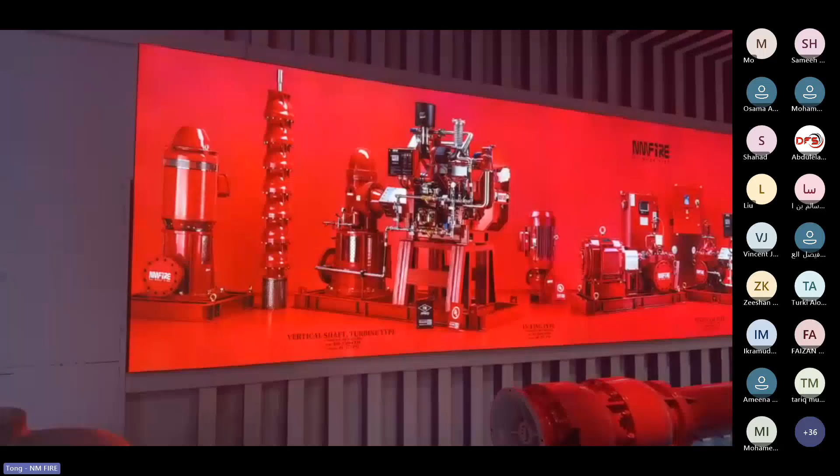As you can see, this picture is showing different types of pumps. First of all, we have a full range of vertical turbine pumps, starting from 100 GPM up to 7,500 GPM, and the pressure we can almost reach is 400 PSI. And of course, we have vertical inline pumps, with water flow starting from 50 up to 1,500 GPM, and the pressure can reach 200 PSI. And this is the split casing pump, starting from 300 up to 8,000 GPM, and the pressure can reach more than 600 PSI.

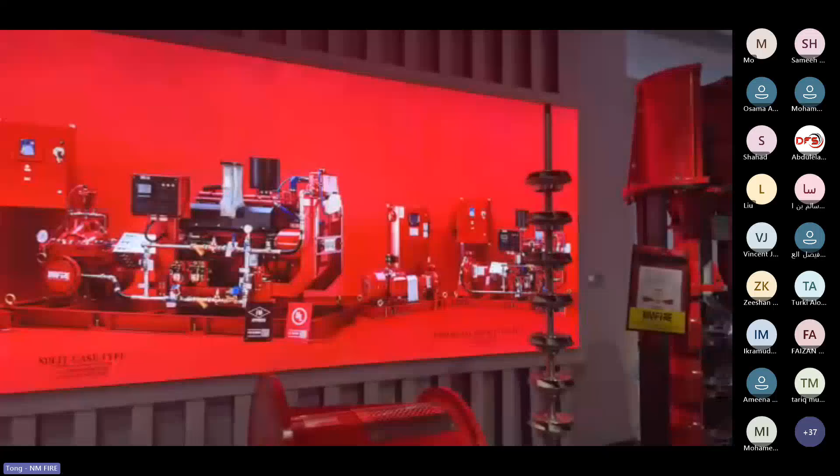And of course, we have end suction pump, starting from... hello, can you hear me? Yes, we are with you. Okay, because just now someone was calling me. This is the end suction pump, starting from 50 up to 2,500 GPM, and the pressure we get is up to more than 200 PSI as well.

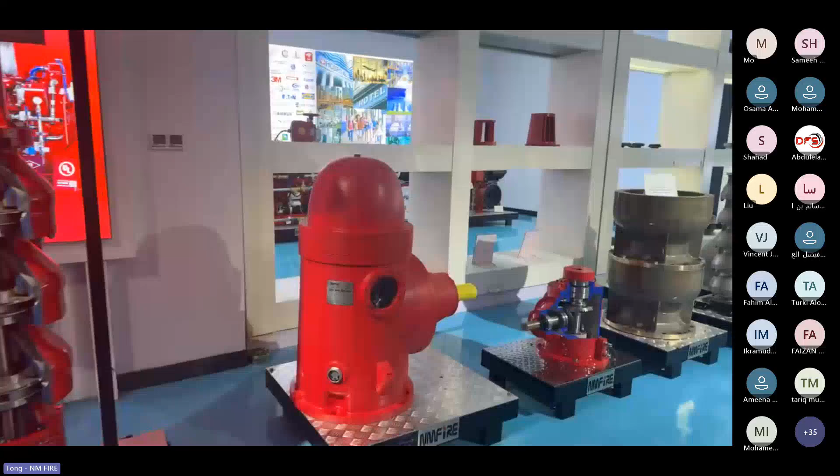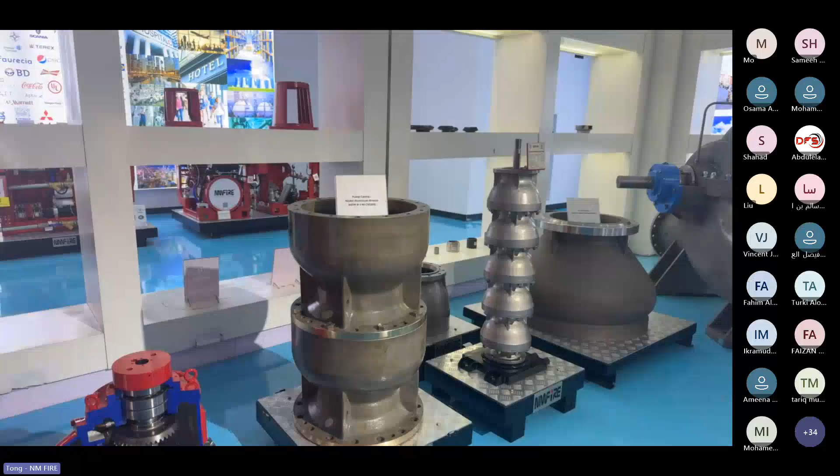Okay, this is our vertical turbine pump and right angle gearbox. For our right angle gearbox, we have our own FM certificate, which is one of the only few choices in the market. And this is the vertical turbine pump, one component made by nickel aluminum bronze for seawater, and duplex stainless steel and super duplex stainless steel. We are very strong for seawater applications as well, as we have our own foundries, and we can produce different grades of material.

In front of you, this is one small vertical inline pump package. This small package includes everything, and what you need to do is just connect suction, discharge, and the power cable. That's all. Whenever you have a very limited pump room, you can choose this type of pump.

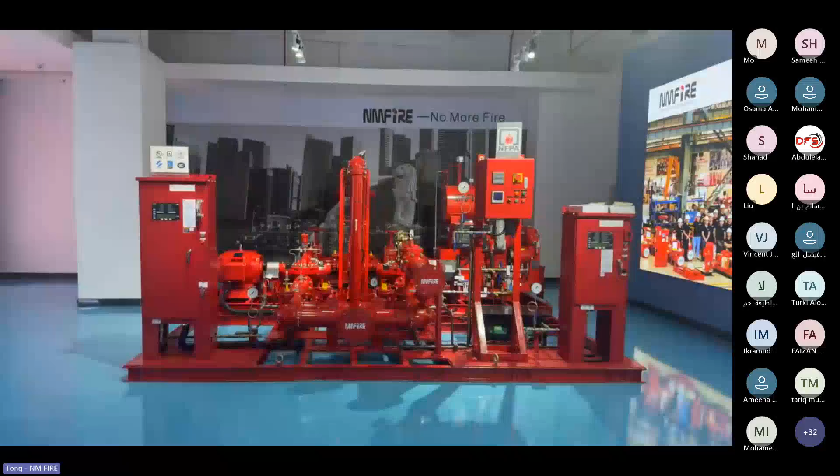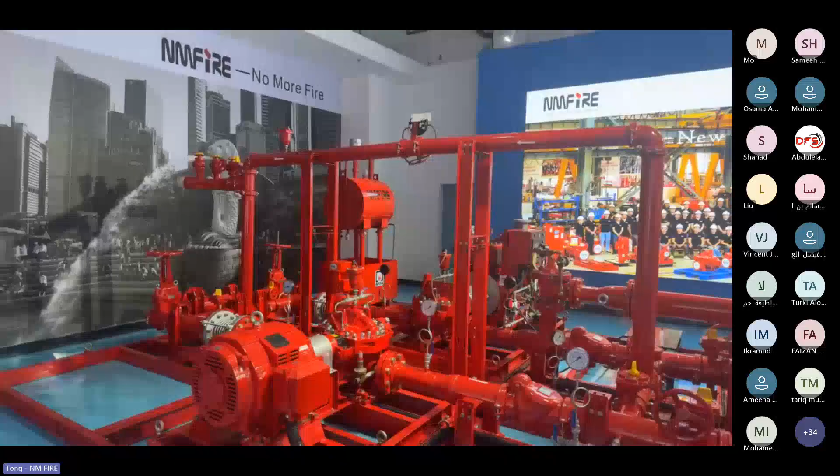And in front of you, this is one standard NFPA 20 firefighting package for split casing pump. Let me check around and show you. Including one electric motor pump and one diesel engine pump, of course jockey pump, and all the accessories like valves, piping, control panel, fuel tanks. This is one-stop solution.

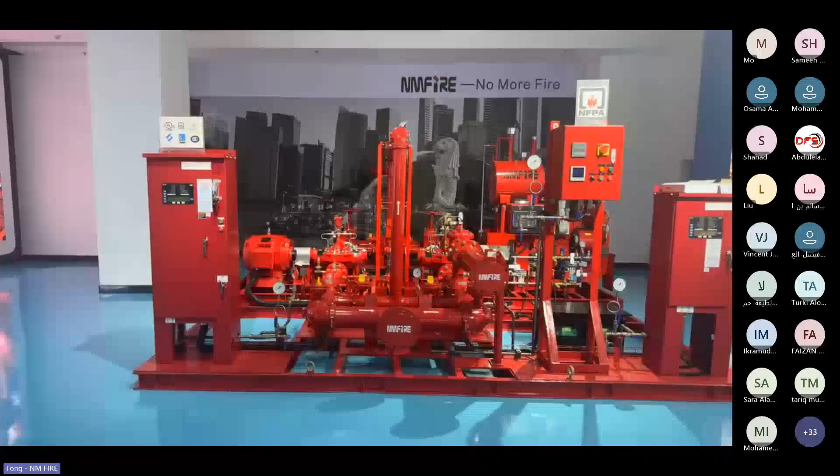We assemble in the factory and we will split it into 3 parts and we can load it inside the container. This kind of package is very convenient for the customer, and they will avoid installation mistakes, because if you have a very good UL listed and FM approved pump, but the installation is wrong, it's also useless, because this pump works as a system, not individually.

Let me go to the other side of the showroom. I will not take too much time inside the showroom, and I will give more time in the factory.

This is our diesel engines. We have our own unique design, which is totally different from any others. So if you are coming to visit our factory, I will give you more details.

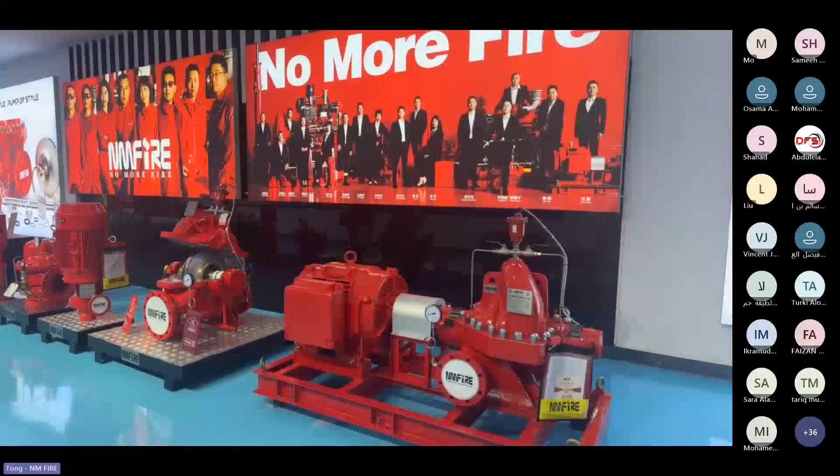This is one of the electric motor pumps with 2 stages. That is why we can reach up to more than 600 psi. This kind of pump is used for high-rise buildings.

And this is one of the base split case pumps for split casing. You can see this is a double volute design. This is very important for firefighting pumps, to balance the force from the exit direction.

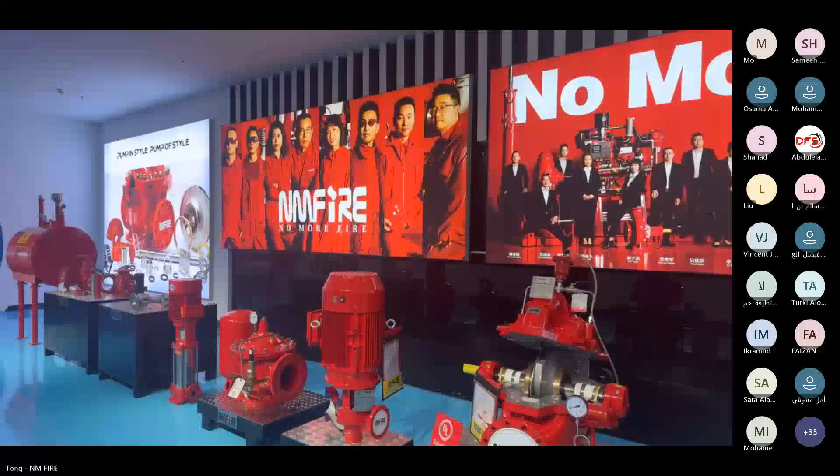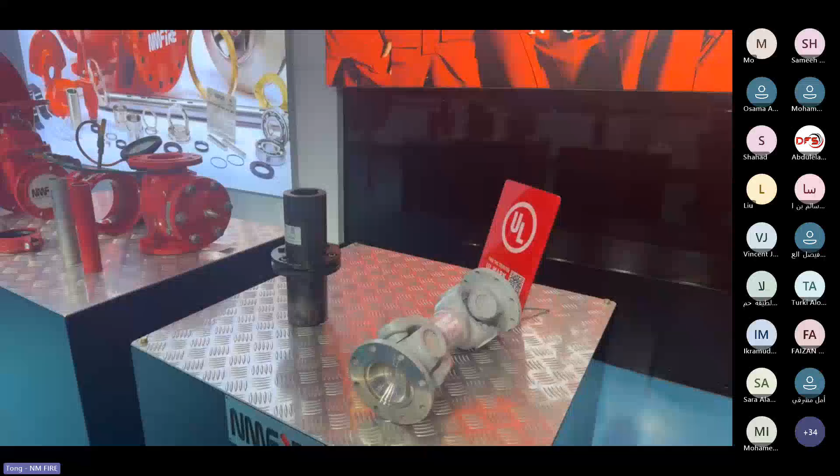And we have vertical inline pumps, as I just introduced. For the couplings, the coupling is one of the key components of the firefighting pump set. According to NFPA, the coupling must be UL listed. So all our couplings are UL listed, already included in our proposal as standard. We are 100% compliant with NFPA 20.

And the fuel tanks. We have our own fuel tank, which is also UL listed. This is our standard equipment, which is already included in our standard quotation. You don't need to ask. So we will provide you the UL listed fuel tank.

Now I'm trying to go outside the office building, and then I will proceed to the factory to show you around.

Our factory is located in Changsha, in Hunan province. Changsha is a very beautiful city in China, and we are located in the center of China. It's very convenient if you come from Beijing, Shanghai, or Guangzhou, taking only 2 or 3 hours, and we are very close to the Changsha airport. So I would like to invite all of you to visit our factory, and then we will have a more deep introduction.

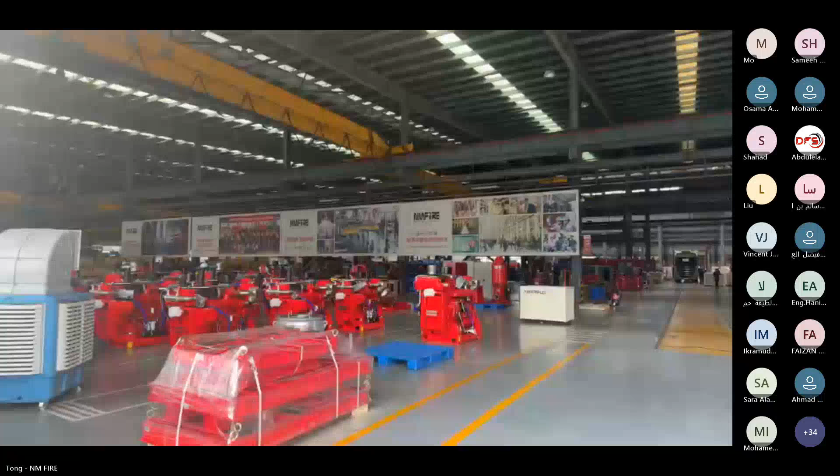And now I'm going inside the factory, and I will show you our assembly line inside the factory. Right now I'm inside the factory now. This is one of the assembling areas of the factory. I will start from here, and then I will show you all the details.

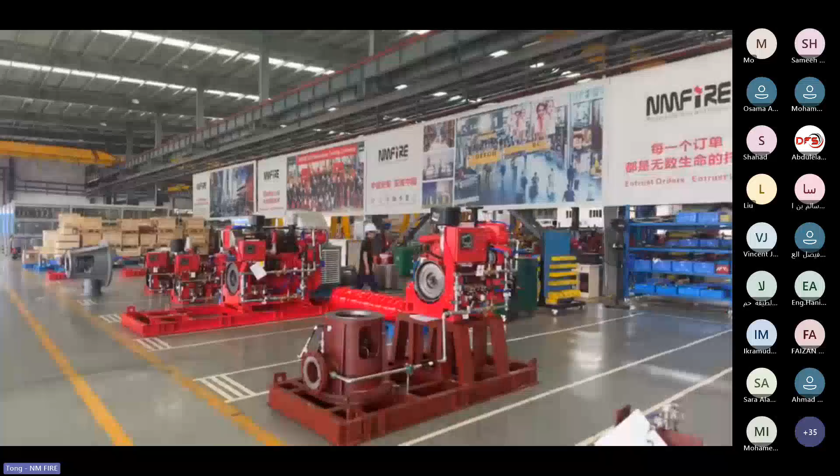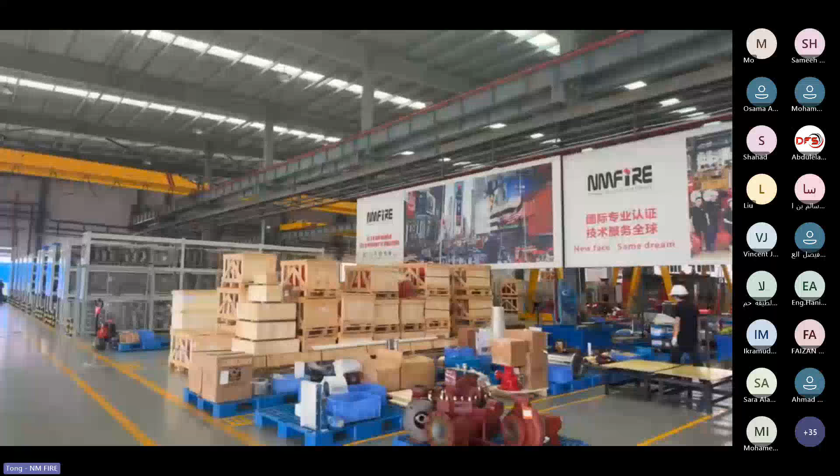In front of you, you will see a small package for the vertical turbine pump. If you look carefully, you will see the difference. We have a common baseplate. Not like others, who install the engine and the vertical turbine separately on the floor. With this kind of design, you don't need to do alignment on site, because all the alignment will be done in the factory. It will save a lot of work at the site.

And this is our stock area. You will see all these components are available at 24 hours. All this is component, shaft, impeller.

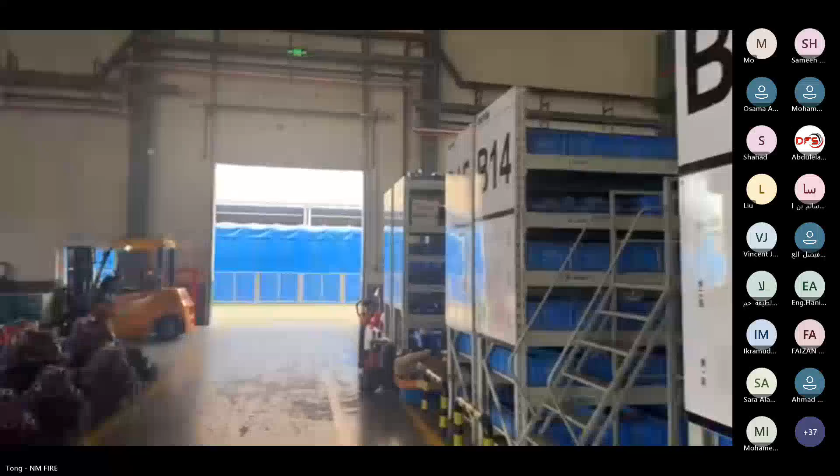And other side is the stock for our bare shaft pump. I will show you here, right here. We invest a lot for keeping a good stock, for the delivery time. That is why we can make sure we have the shortest delivery time, which nobody can offer you.

For diesel engine pump, we can finish it within 4 weeks. If you have any urgent project, we are the best choice. Because we are producing everything by ourselves. We are producing the pump, we are producing our own engines, so we don't need to depend on any others.

This is our diesel engines, and it's already been tested. And in front of you, this is one of our machinery areas. I will show you.

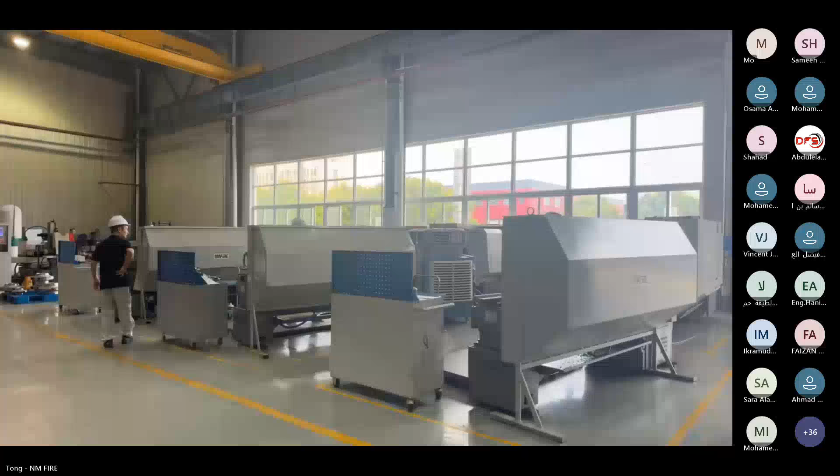So the impeller and stuff. And we have our own foundry, but it is not in this Changsha, because Changsha is a city. It's not allowed to have the foundry inside Changsha. So it is outside of the city.

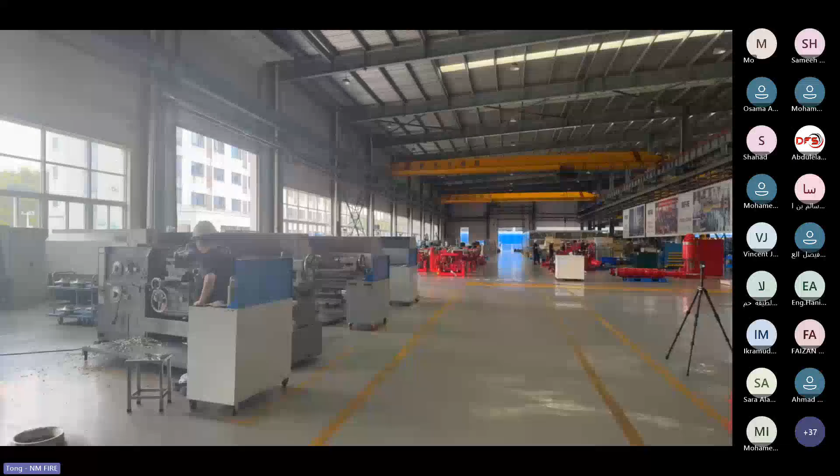In front of you, this is the biggest firefighting pump in the world with UL and FM certificate. The water flow is 8,000 GPM.

This pump is already installed in the Daxing airport, which is the biggest airport in the world. With 8 pump sets, we won this project already. And this pump is right now working well in the airport project, in Daxing airport.

And in front of you, this is one of the projects in Cyprus, in Europe, for the seawater application. I will show you closely. This is a duplex stainless steel seawater vertical turbine pump.

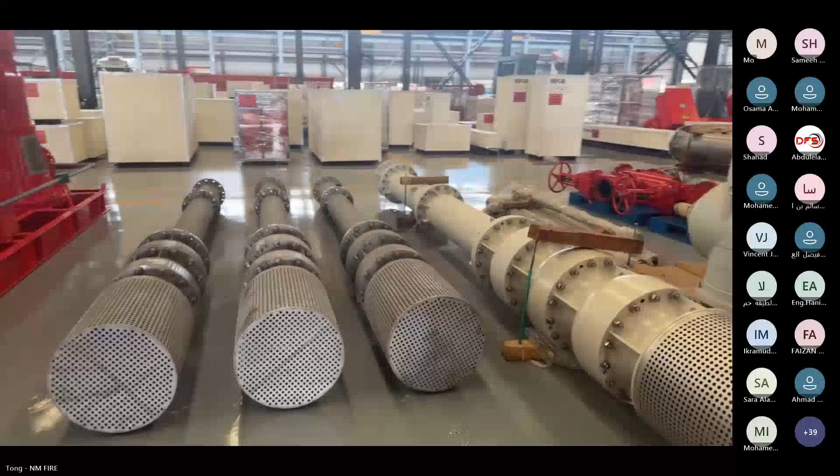The seawater application. And this is the diesel engine, and the pump will be installed down below to suck the water from underground.

I would like to highlight also this one, this blue color. We call it torsional coupling. When you are using a vertical turbine pump with an engine driver, you have to use the torsional coupling according to the NFPA standard. But unfortunately, right now, most of the manufacturers don't want to use it because they want to save the cost. But the product from our factory, we are 100% following the standard. This is our standard component, if you are using a diesel engine driving a vertical turbine pump.

And there's one more assembly area. Let's see.

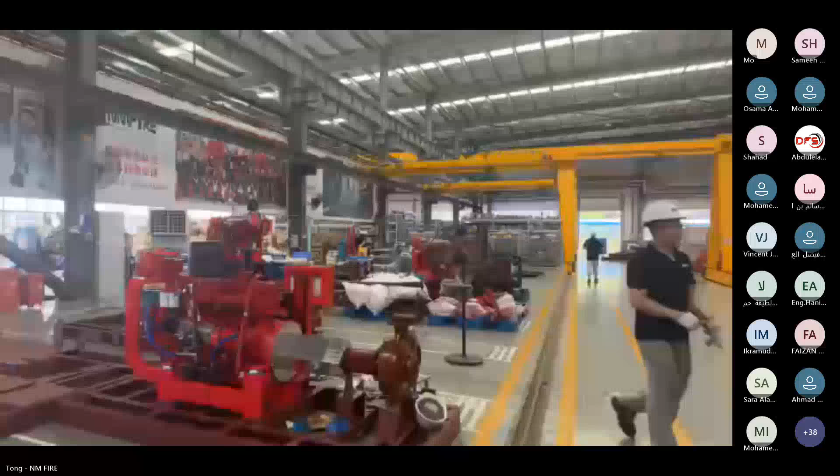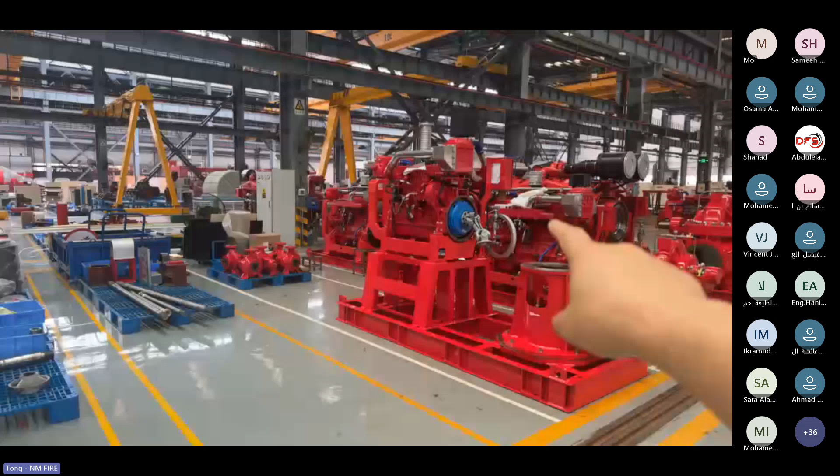And from the other side, I will take you around. This is the normal volute pump for the small size pumps. Over here, you see all the vertical pumps. We have this blue color, the torsional couplings, according to API 610 standard. We should have the torsional coupling. Of course, as I already introduced, we have the common baseplate for the engine and for the pumps. We are not only installing the pump, we have the common baseplate, so this will be easier to sign off.

This is a 6,500 GPM pump.

I will show you later. The Airbus aircraft company, they have invested in one component factory in Shanghai. So this factory needs 5 pumps to be protected, and they have to buy the insurance. So we are providing all the pumps for them.

And I would like to show you here, you see all the pumps which we already packed, ready for delivery. And you can see in front of you, it's continually loading.

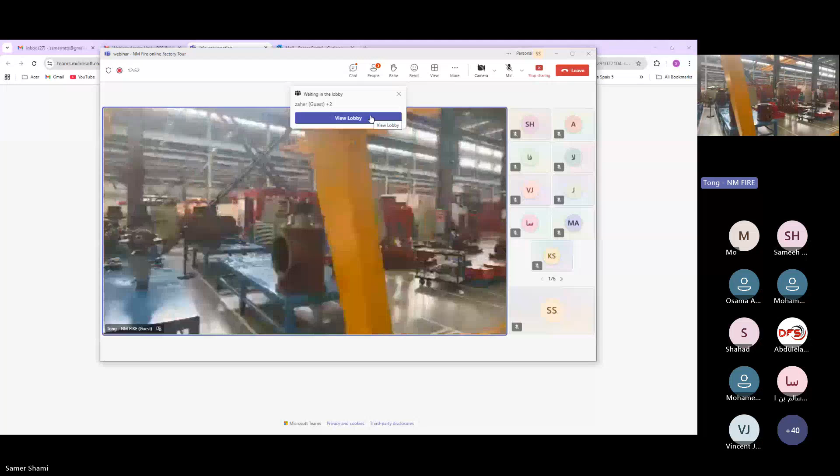As I have already introduced, we are manufacturing the right angle gearbox. We have our own FM certificate for our right angle gearbox for vertical turbine pump. In this factory, we produce everything by ourselves. Let me go inside.

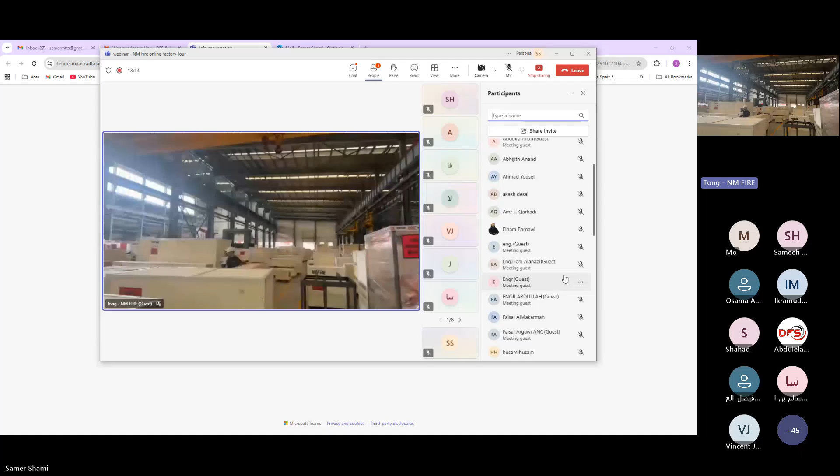Loading areas, you see, that's full of orders. These orders will all be delivered within this week. Full of orders from different countries, and continually loading, 24 hours loading. The business of this year is booming.

And today we have some, almost every day we have customer visits for the witness testing, you know.

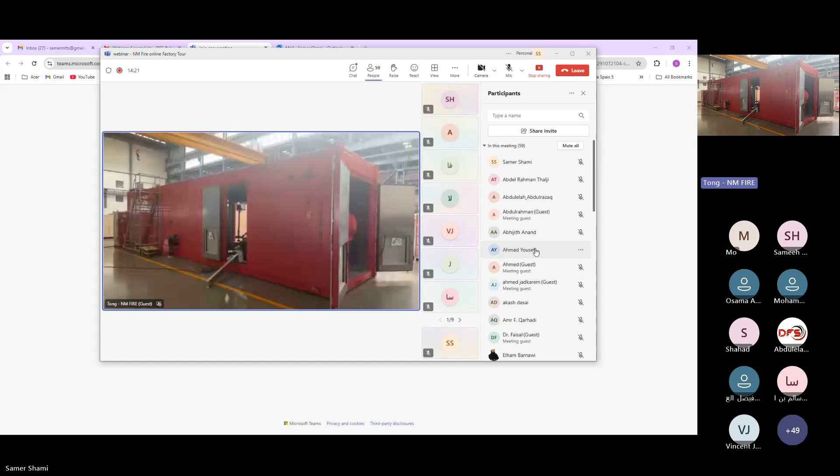In front of you, this is one containerized firefighting pump package, where we installed the pump and all the accessories inside the container. So with this product, you don't need to have a pump room.

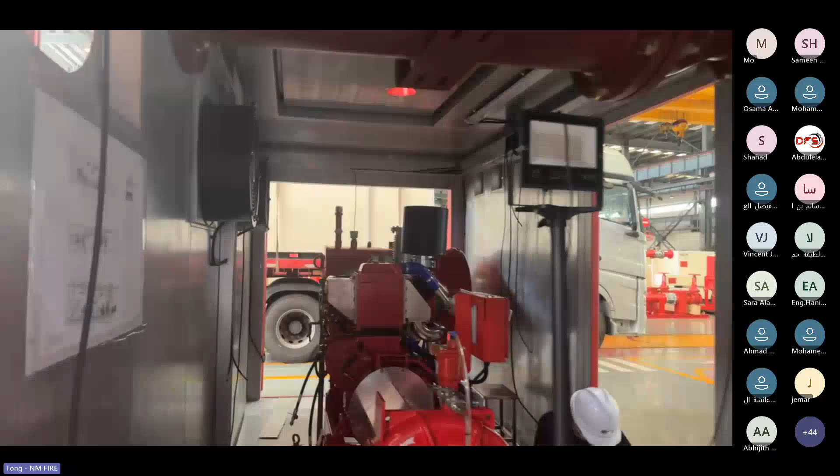Okay, I will go inside and show you the details. You see, this is the engine, one diesel engine and one electric motor, and this project requires 2 jockey pumps, along with the air conditioning ventilation system, lighting system, sprinkler, control panel, and all the valves, everything. So what you need to do is just install it and connect the suction and discharge. That's all.

You see, full of orders. NM factory.

From this side, you can see us clearly. They are continually loading.

This is one more assembly area. NM factory. I will go inside. Today we have some customer visits also for the witness testing. Let me go inside from here.

This is some of the small speed firefighting pump. This pump is 5,000 GPM for a Singapore project with a high voltage electric motor.

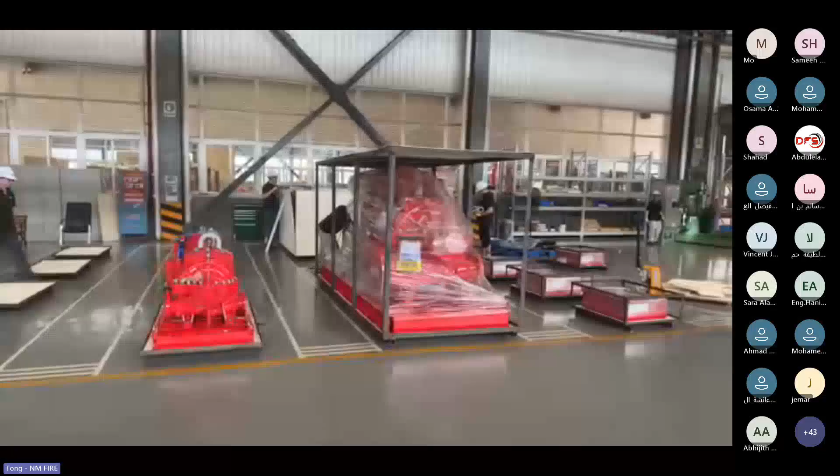And also the diesel engine pump, the diesel engine driving. This is how we're going to packing. This pump is going to Poland with 5,000 GPM also. We have received a lot of very big size, big projects, you know, like 3,000, 3,500, 4,000, and above.

So we use the iron bar and then we use plywood to cover it. And for the product, we use plastic to cover it, to protect our product during transportation.

Now I'm going to show you our testing area. You can see now they are shifting a high voltage electric motor pump to the testing center, and going to test it.

Let me go up and show you from the top. This testing bench, under the ground, all is water. We have testing water of around 8,000 cubic meters under this ground, and the depth of this testing pool is 14 meters. At the same time, we can test 5 to 6 units, depending on the size of the pump.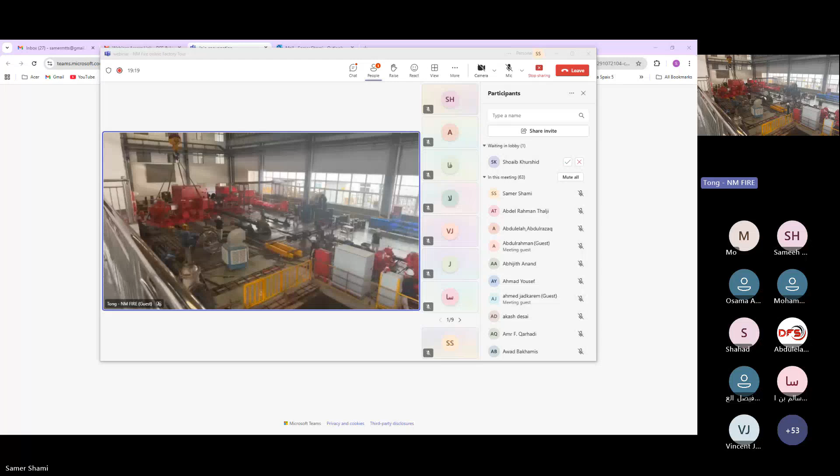And we can test up to 5,000 kilowatts capacity of power, which is more than the fire pump used. And for different frequency, from 25 hertz up to 70 hertz. That is why we are very strong for the Saudi market, for the 60 hertz, not only for 50 but also for the 60 hertz.

I can show you around from there, for the whole factory. Okay, let me go inside.

This is our testing control room. We get all the signal and then transmit it to this testing control room, and we can remote control from here and generate the testing report from here.

And all this testing facility is calibrated by the authorized party. This is the certificate from UL, which you can see only in an NM Fire factory. As you can see, UL 448 is for the pump, and UL 1247 is for engines. Which means at the same location, the same testing area, we can test pumps and these engines. This is modified by UL.

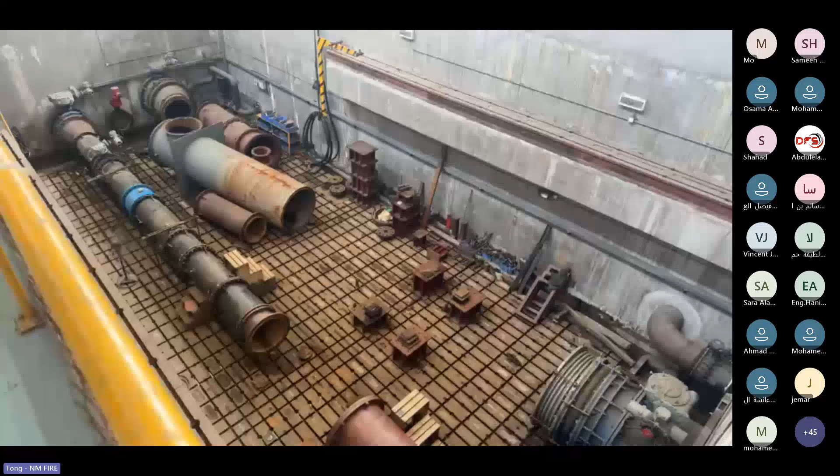Down below, we have one more very big testing bench. This is for the big fire pump, like 8,000 GPM, and some of the projects require positive suction. We can test down below.

Right now I'm on the testing center side, and you can see our staff just now installed one high voltage electric motor pump. I'm going to install it, and then we're going to test it tonight.

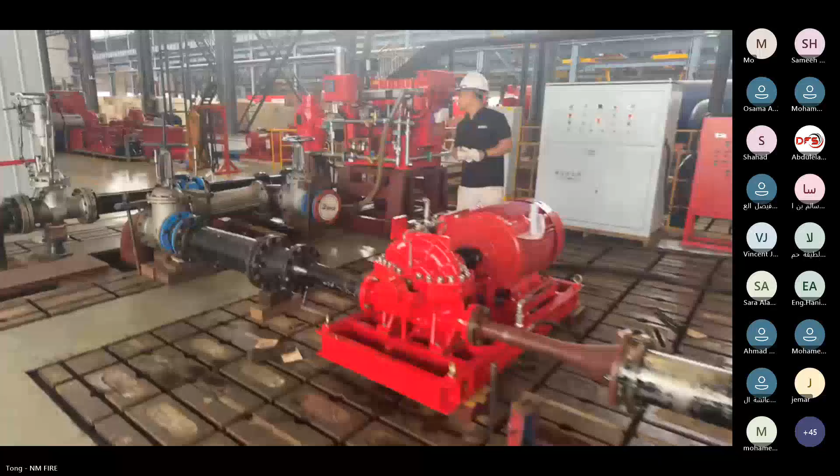And there are two more pumps, one small and one vertical turbine pump, installed. And there's one more, sorry I can't show it, one more, this is for the Airbus project. It's been installed and ready for testing, with our own NM Fire diesel engines.

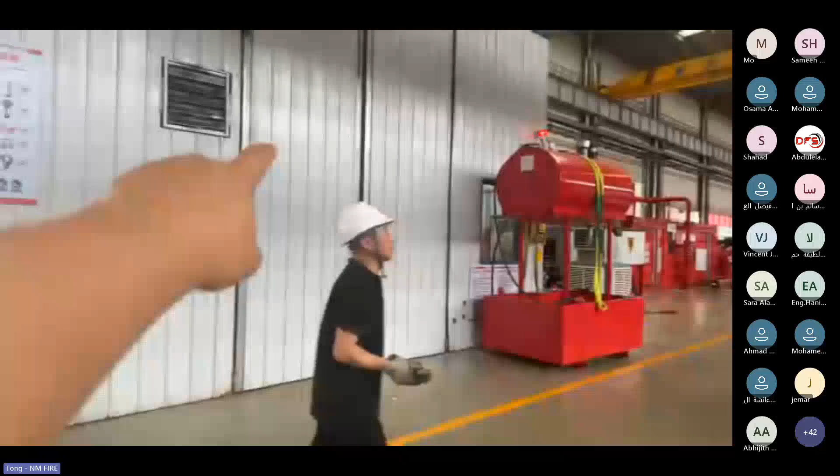Let's proceed to the other side. I will show you another testing bench for the diesel engine pump set. Inside this building is one of the diesel engine pump set testing benches. I will go inside and show you.

If you look on, one diesel engine pump is already tested, and we'll be going to disconnect it. Already finished the testing.

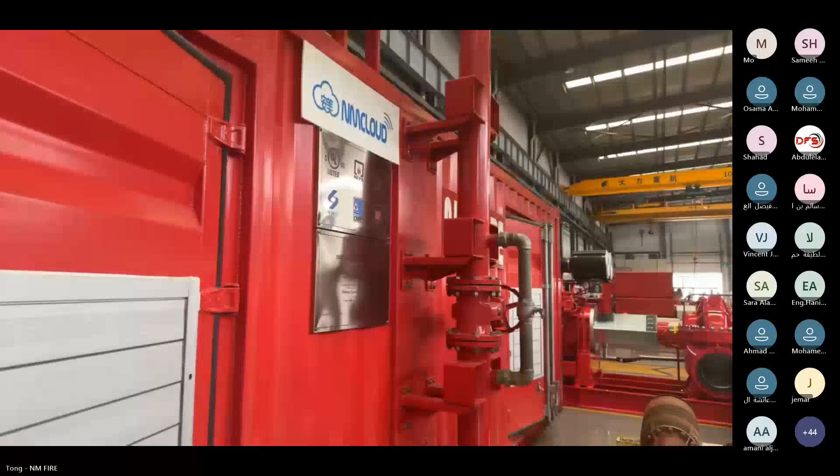And all these pumps are waiting for testing. And here, this is one containerized pump package. This is our first generation of the containerized package. Okay, we installed it here.

Just for training purposes, let me go inside and you will see the details. Okay, now I'm inside this containerized pump. You can see it includes one electric pump, one diesel engine, one jockey pump, okay, and a few tanks, of course sprinkler and all the piping. And we can install what we call the NM Cloud with this control box.

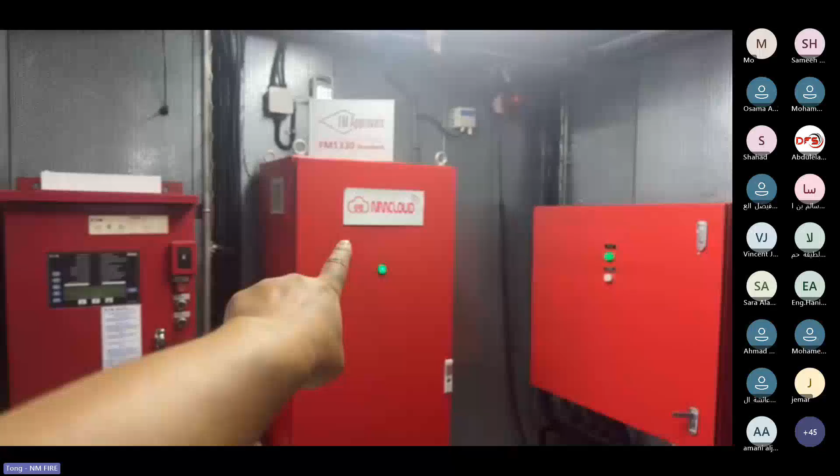Okay, we are going to apply for the FM certificate according to FM 1330 standard. And we get all the signals, for example the pump bearing temperature, vibrations, RPM, flow, pressure, even the camera so you can see the pictures, okay?

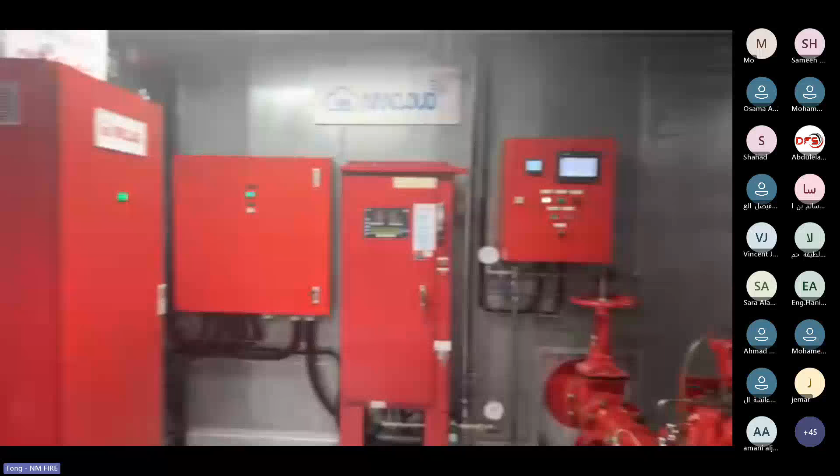And then we collect all these signals into this control panel, what we call the NM Cloud control panel. This control panel sends all this data to your mobile phone or computer. Whenever you are, you just take out your mobile phone, download the app we call NM Cloud, and then you can monitor everything. You can get all the information about your pump room, about the condition of your pump and your tank. Right now we can provide you this kind of service.

And this is one more seawater vertical turbine pump, as you can see. Very high quality, this is very expensive for seawater applications. And this is one more, for the one I mentioned for the aircraft project.

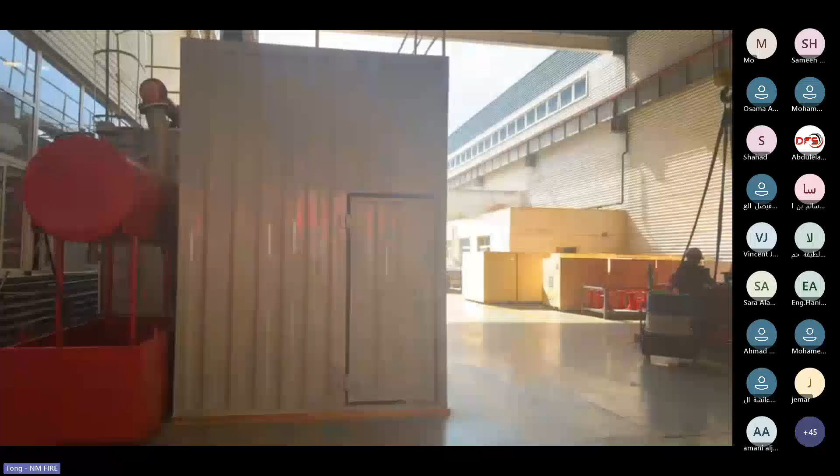And we have one more testing bench, okay, for diesel engine pump sets. So my colleague is going to install one more pump set inside this testing bench.

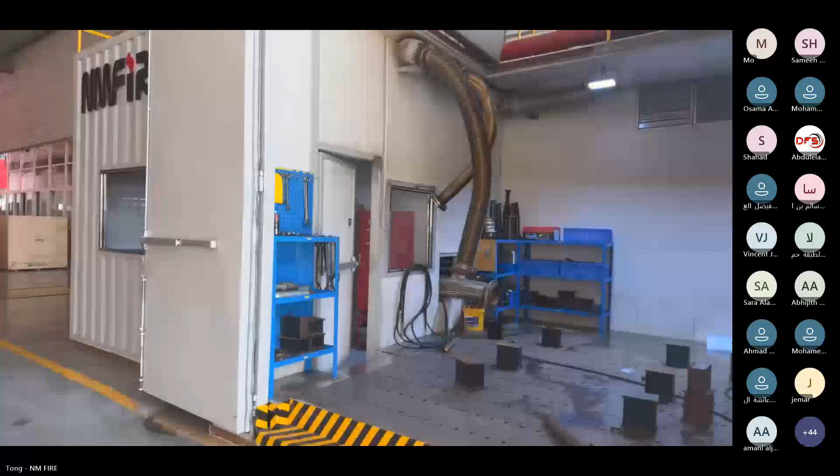And I would like to go inside this diesel engine producing plant, as you can see. This is the place where we produce our own diesel engine.

This is the place where we produce our own diesel engine. And in this factory, we can produce more than 3,000 diesel engines per year.

Inside is our stock for components. And we are assembling our own instrumentation for our control panel. This is for another side.

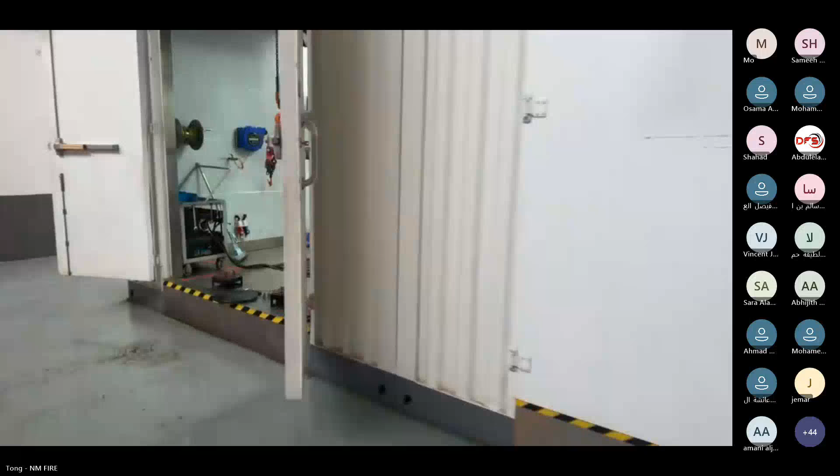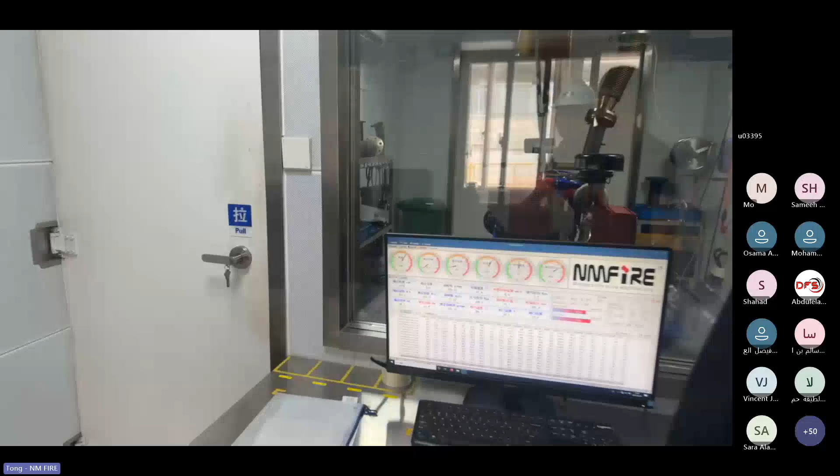This two diesel engine testing bench can test up to 300 kilowatts. And I will show you another three.

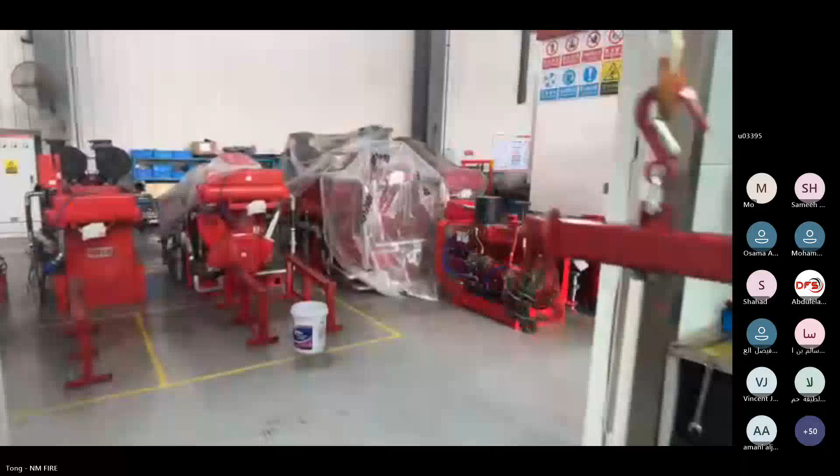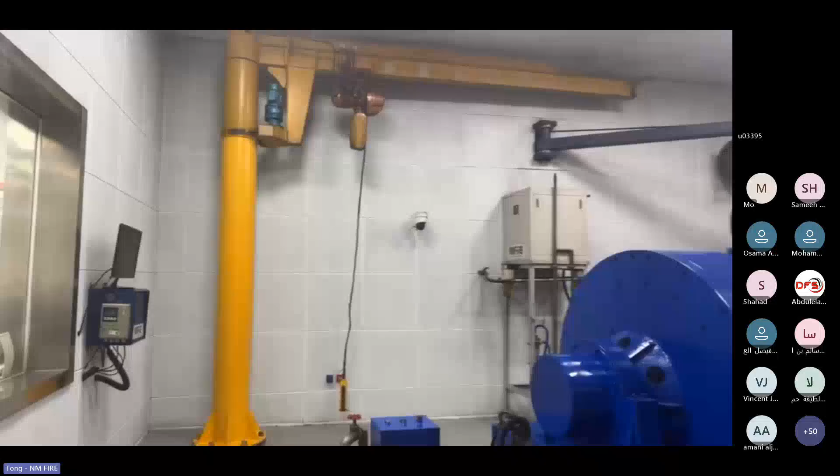This diesel engine testing bench has a capacity of 1,200 kilowatts. The capacity of the testing is 1,200 kilowatts, which is the biggest diesel engine testing bench in the world. This is also the reason why we can get this, the biggest project with 8,000 GPM pump, for the Daxing Airport project. Without this testing capacity, of course, we cannot win.

And this is one more, okay. And this is the certificate which I showed you just now, UL 1247, this is for engines. And this is one more.

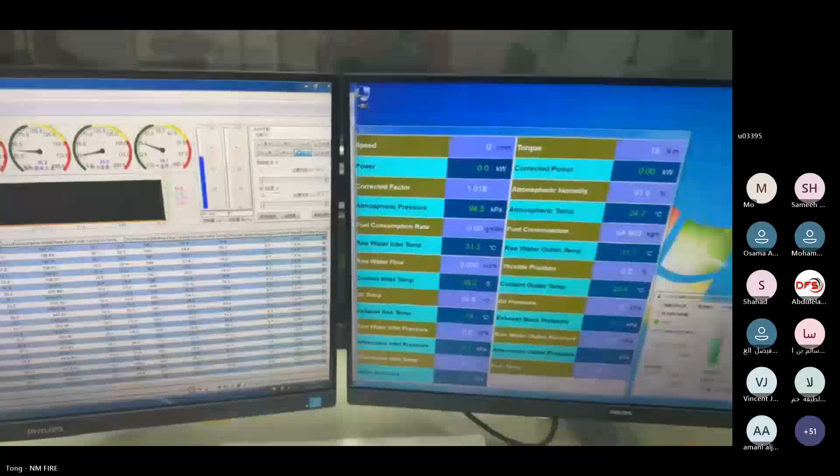So inside, I will show you inside, warming up one engine.

Okay, so we have one more on the other side, which is the oldest one. We will remove it and we will build another two, because since the orders are coming more and more, we need more testing benches to meet the order requirements here.

They are installing one diesel engine inside the testing bench.

For our diesel engine pumps, we test at least 2 times. One is the diesel engine itself, we test it here individually, only the diesel engine, and we will give you the test report for the diesel engine itself. After the diesel engine is coupled with the pump, we test one more time at the pump set, so we will provide you the pump set performance testing report.

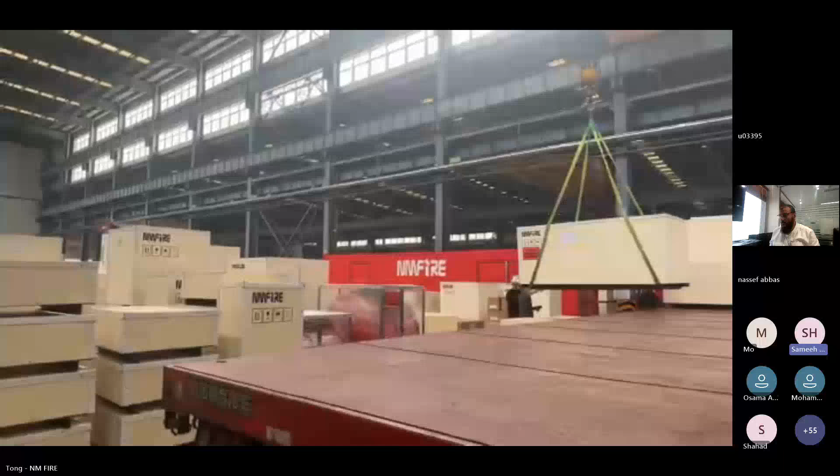The first question is, what types of testing are being conducted for the diesel engine? What types of testing are conducted for diesel engine? What are the testing related to the diesel engine NM is conducting?

Generally, like the power, speed, we will be producing on diesel engine testing, the performance testing report, including the power, speed, and temperature, vibrations. Those are all the main factors we need to test. Of course, we have some more.

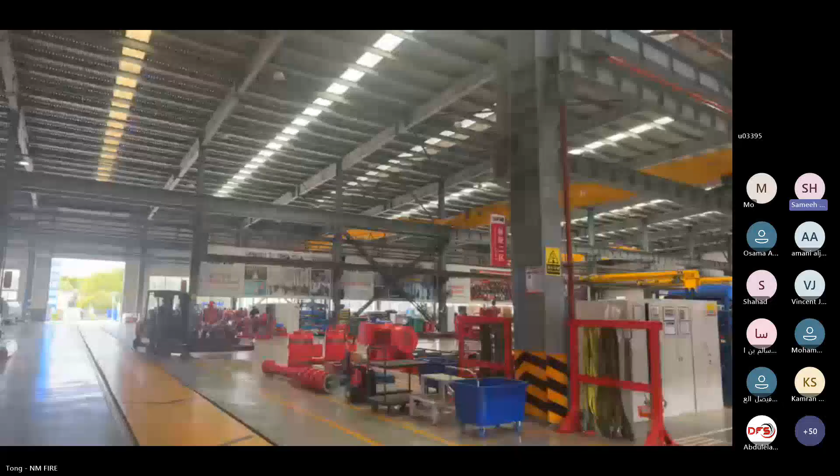Also, there is another question related to what is the advantage of NM fire diesel engine compared to other manufacturers, especially the European and US engines, regardless of the price.

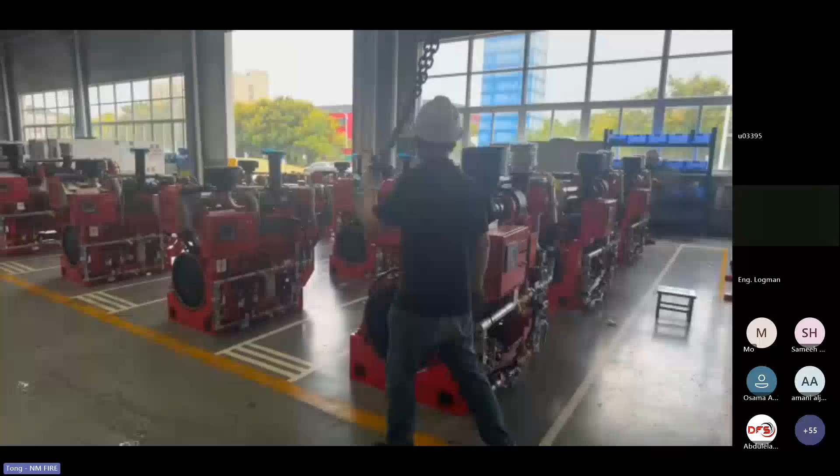So first of all, as I said, the design. Because just now, maybe I'll go inside the showroom, I can give you more idea because already I can start from here. This is our diesel engine. Later, when I go into the showroom, I will give you more details, introduction about our diesel engine, about the design, and about the difference than any others, because inside the factory is too much noise.

Okay, I will keep this point. Now I'm going to the showroom. You can give me other questions if you have. If you have some other questions, I can answer you now.

I may answer one of the questions related to the installation. For the installation, yes, we are doing installations for the fire pumps we are supplying. And of course, the warranty is included related to that.

Okay, now I'm inside the showroom. Let me give you more details, introduction about our diesel engines. Yes, yes, please.

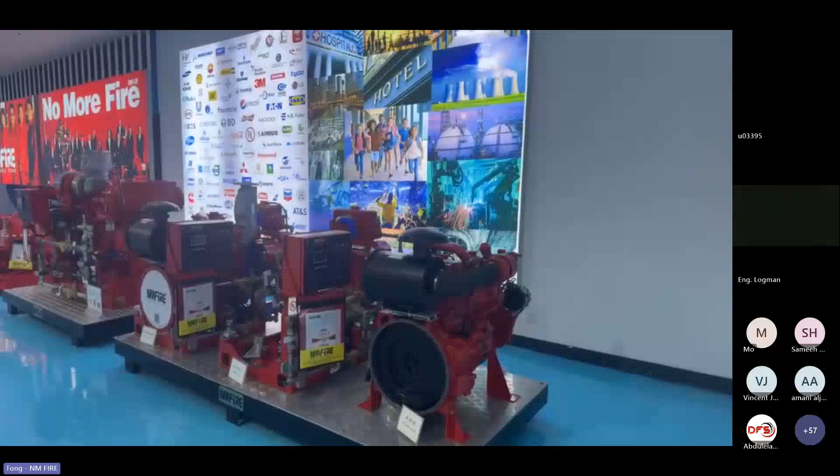After we select all these engines, according to our pumps, we have to select different power, different speed of this engine from maybe more than thousands of models. We have to select it and test it. Then these engines, most of them will be destroyed because they are not suitable for the firefighting purpose. They cannot pass the testing of UL, FM.

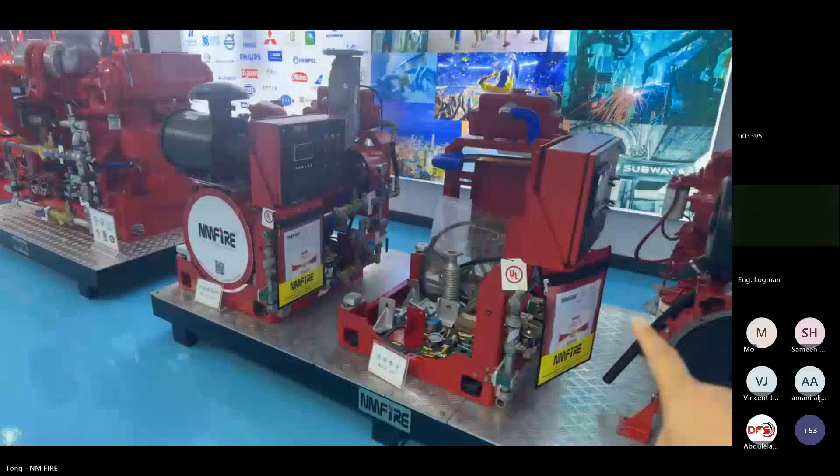So some models get success to get the UL and FM, and this is our modification part. This is what we call the modification part. You can see here, modify part - including the frame, the instrumentation, we call the instrumentation, and of course, the cooling loop and the heat exchanger.

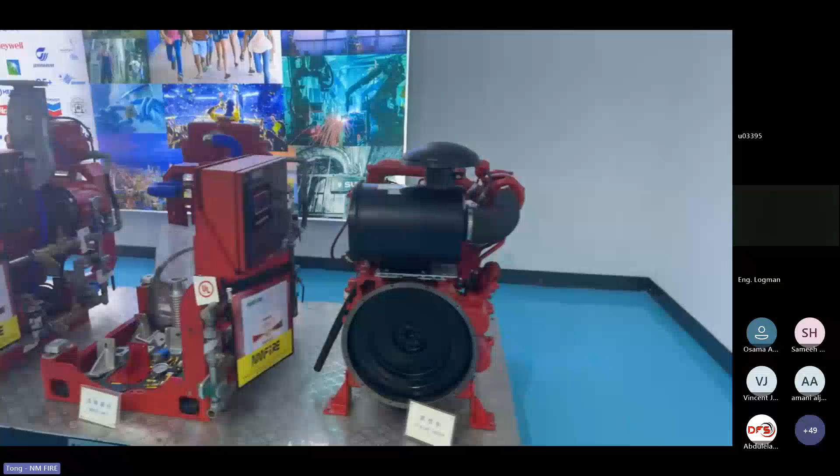And this is our diesel engine after we assemble it. So this original diesel engine from the engine manufacturer is a very general diesel engine. You can use it for many purposes - for irrigation, for generator, even for the truck. This is the general engine.

This is not a firefighting diesel engine. Before it becomes a firefighting diesel engine, you need to do a lot of modification according to UL, FM, and NFPA20. So first of all, you should have the instrumentation. If you look at our design, which is totally different than anybody, our instrumentation is on the frame - installed on the frame.

This is the frame. It is not directly on the engine. If you see others' engines, their instrumentation is directly on the engine. So our engine is on the frame. This is very important. Why?

If you install the instrumentation on the engine, it means the big problem of the engine is the vibration, right, which nobody can avoid. So the vibration of the engine will directly affect the instrumentation directly, because it's installed on the engine. But our instrumentation is on the frame, and this original engine will be installed on the frame.

There will be 4 vibration absorbers to minimize the vibration effect to the instrumentation and the cooling loop. So this kind of design will minimize the vibrations and keep the instrumentation more safe. If the instrumentation and cooling loop are directly on the engine, after some time of vibration and heating, the instrumentation - because inside there's a lot of very sensitive electronic parts - will be affected, and problems will come. Also in the cooling loop, maybe the joints start to leak. And this is number 1.

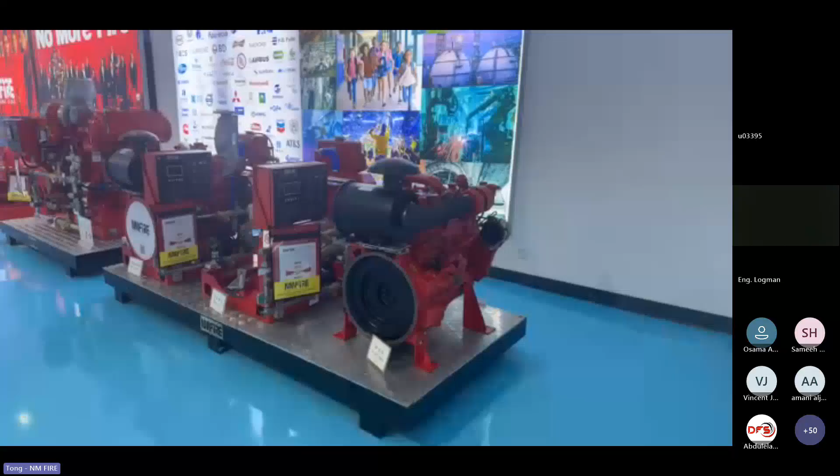And if you are making a hole or a support directly on the engine, of course you will damage the warranty given to us by the engine manufacturer, because the original engine manufacturer will say why are you making a support or a hole on my engine, so you have no more warranty from the engine manufacturer. Okay, and this design you see is very simple and very standardized.

We have many engines, but we have only fewer models, fewer frames, sizes of the frames. So we can easily keep a huge stock, and we don't need very experienced workers to do this job. Just normal people can do it, because it's very simple. But when everything is installed on the engine, you need very experienced people. Otherwise, they cannot do this job, you know.

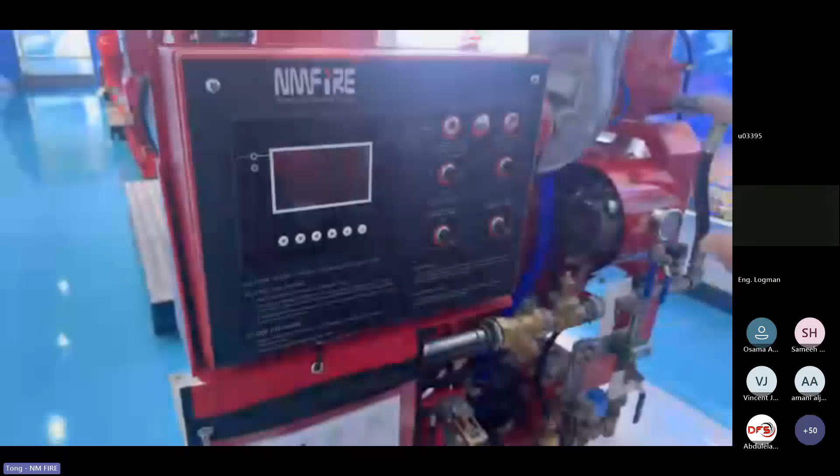Now come to this instrumentation. You see this instrumentation, we have a separate certificate for it. This is what we call PLC control, and this is digital display. So for example, if you see 100 psi, it is 100 psi. It is not a gauge, okay. Many people are using the gauge, but this is directly showing you the data.

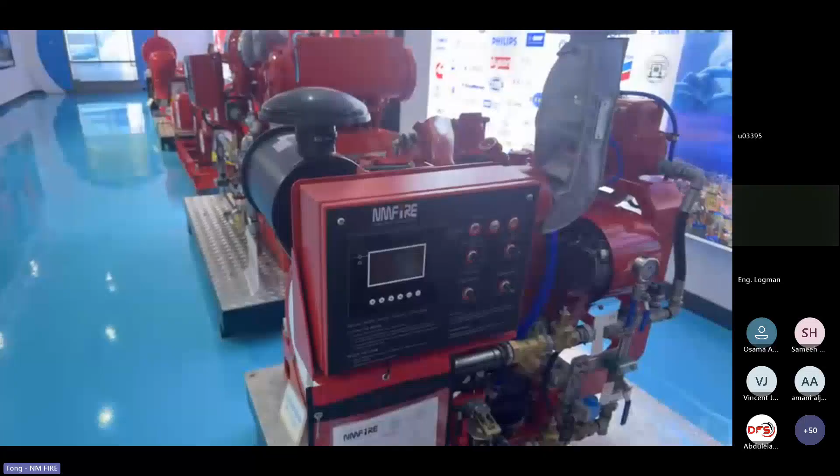And this instrumentation is fire resistant and waterproof, with IP68, IP58. Yeah. Okay, so these are the advantages, these are the unique design features about our engine, which is totally different from any others. It's totally different than any other.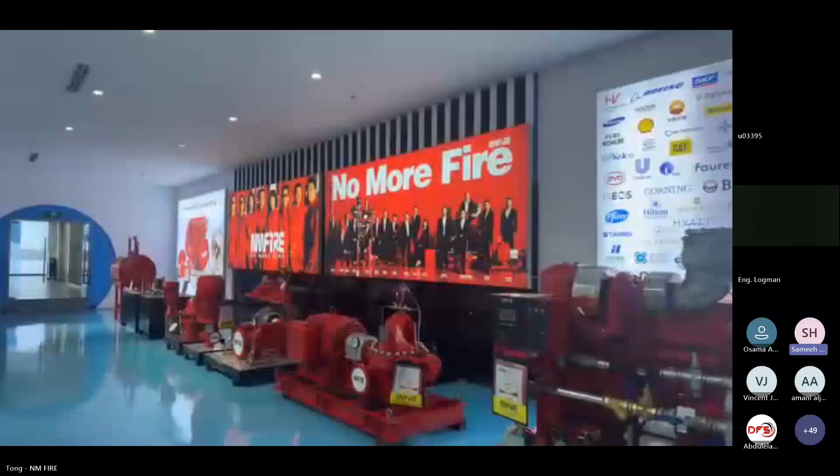Okay Sami, we have another question related to the diesel engine, related to the RPM. How are we doing the RPM, adjusting the RPM, and related to the full speed limitation and the overspeed, how are we doing this in the factory.

You mean the RPM, after you set it, you are not allowed to adjust it, you know? Yes. Yeah, according to the standard, you are not allowed to adjust it.

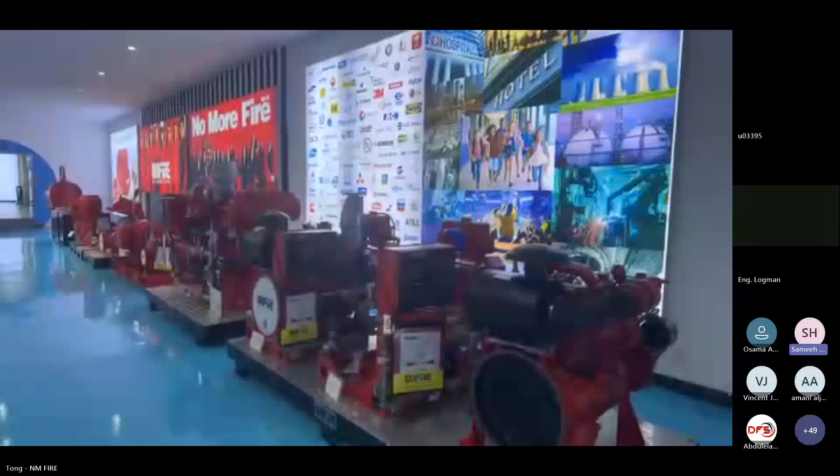Let me clarify also the points related to the same question. For any engine we are producing, it is based on specific parameters related to the UL and FM requirements. So there are some engines having a listed and approved range for power and RPM, and some engines may have a specific RPM and power. This is based on the requirements of UL, FM, and the parameters for the testing.

So for any engine we are delivering, it is already factory adjusted for the RPM based on the request, and based on the certification we are getting from UL and FM. Also the engines come with already adjusted overspeed limitation for each unit we are delivering. You see here, this is our speed testing.

We have another question here related to what is the most likely failure mode of this fire pump: mechanical failure, bearing, control, cavitation, and how it is mitigated through preventive maintenance.

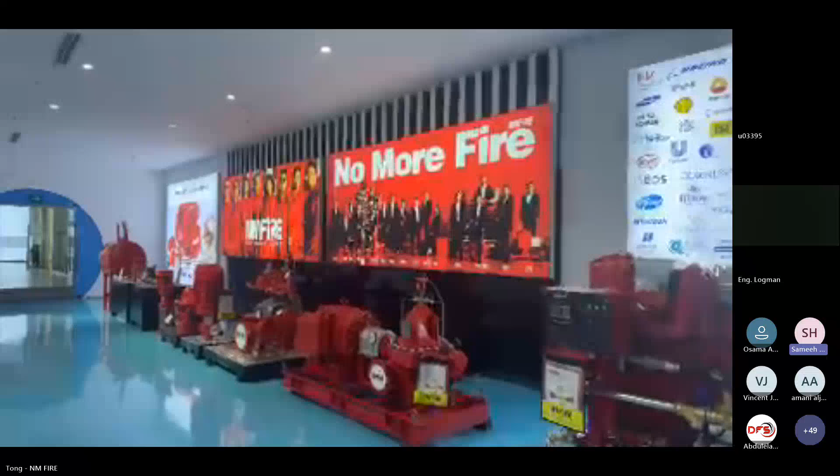Just let me mention something, and you can also add to my answer. Of course, preventive maintenance is essential for the fire pumps, and you can make the schedule for that based on the recommendations as per the NFPA 20 and 25 requirements. Also the IOM manuals, including the steps for the required parts you need to check. The fire pumps don't have a mechanical seal, they have packing rings, which makes maintenance easier.

Bearing, you have also to conduct the weekly test, so you can make sure that you are not facing a problem related to the bearings, as well as the other components of the pump.

For the cavitation, actually it is related to the site condition, especially for the suction line. You have to make sure that your design and installation are as per the recommendation of the installation to avoid cavitation, related to all the suction conditions. That's it. This is generally for this question.

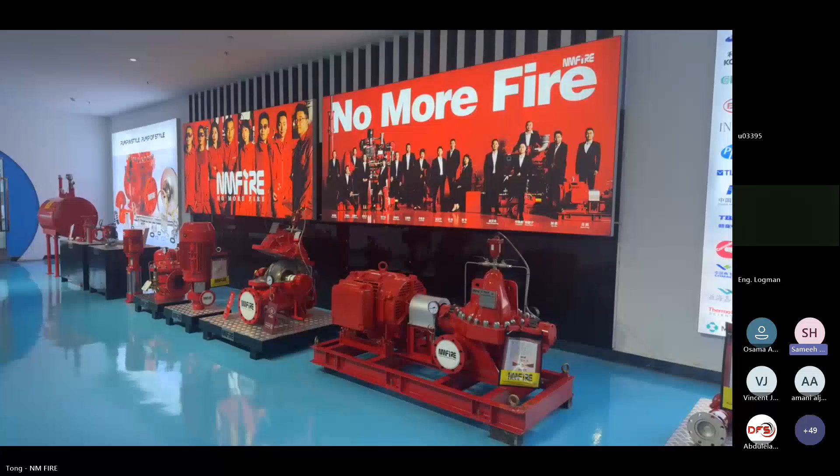There is another question related to please explain how altitude, and I think it is related to engine derating. May you answer the question, please? Yeah, of course, you can.

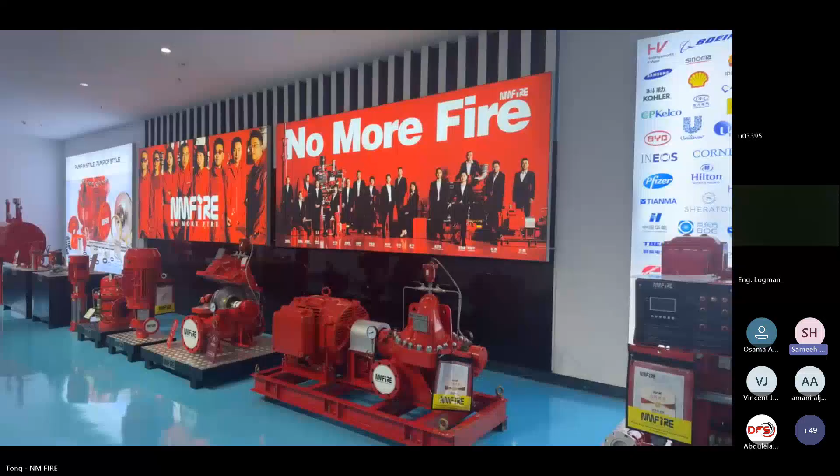For derating, of course, the ambient temperature and altitude of the site is one of the major points we need to consider during the engine selection. The engine parameters as listed are based on ambient temperature of 25 degrees Celsius and about 300 feet. So based on that, for each parameter, there is a correction factor we have to calculate if the temperature becomes higher and the altitude also becomes higher. For any inquiry related to this, we can provide the derating calculation, and based on that we propose the suitable diesel engine.

So when you send the inquiry, as Mr. Sami said, the major factor you have to provide is the site condition. For example, the temperature of the site - you need to give me the maximum temperature and also the altitude. According to the data you provide, we will select our engines and do the deduction. For example, for temperature above 25 degrees, each 5.6 degrees we will deduct 1%. And for altitude above 100 meters, each 100 meters we will also deduct 1%. So according to this, we will get the actual power of the engines suitable for your site conditions.

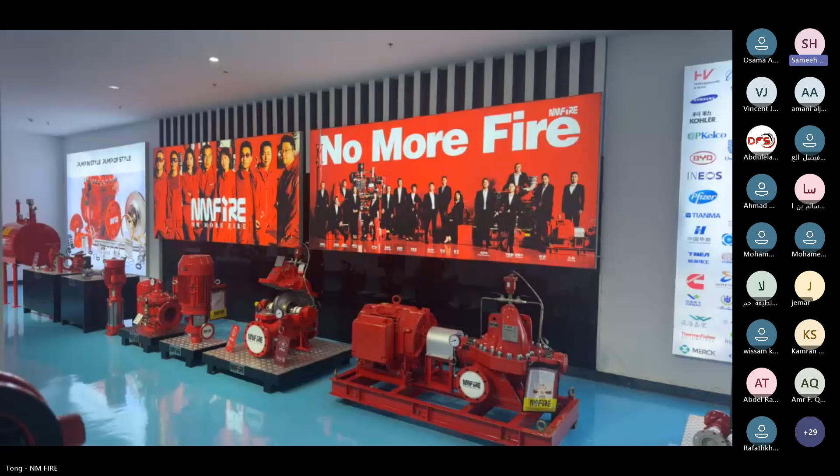I will mention one point related to that, and also Tong, if you have an additional point to add, this would be great. Yes, it is. It can be considered 1% of the main pump flow rate, and there was a hint from NFPA 20 that it is related to about the smallest expected demand on the system, like one sprinkler, which is nearly equal to 1 GPM, up to 10 times this value. So we can say that you can choose or select the jockey pump with flow rate 10 GPM, and the head based on the system requirements.

So this is the point, or 1% of the main pump flow rate. Do you like to add something, Tong? Yes, so this is generally 1% of the main fire pump rated flow. This is a recommendation. Of course, if your system, for example in some very old buildings, there's a lot of leakage in the pipeline because it's very old, the investor is not going to replace the whole fire piping line. So the consultant or designer will add this kind of leakage to include in it, so that maybe more than 1% of the rated flow. But from the NFPA 20, they recommend you to have 1% of the main fire pump, and the pressure is 10 psi higher than the rated main fire pump head.

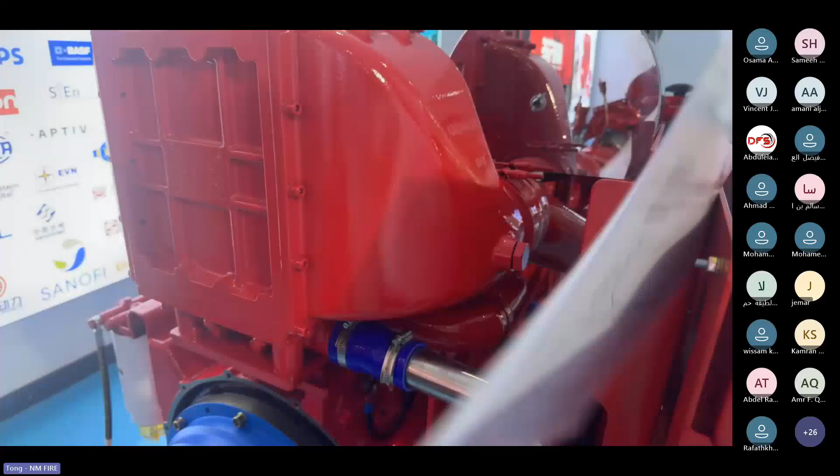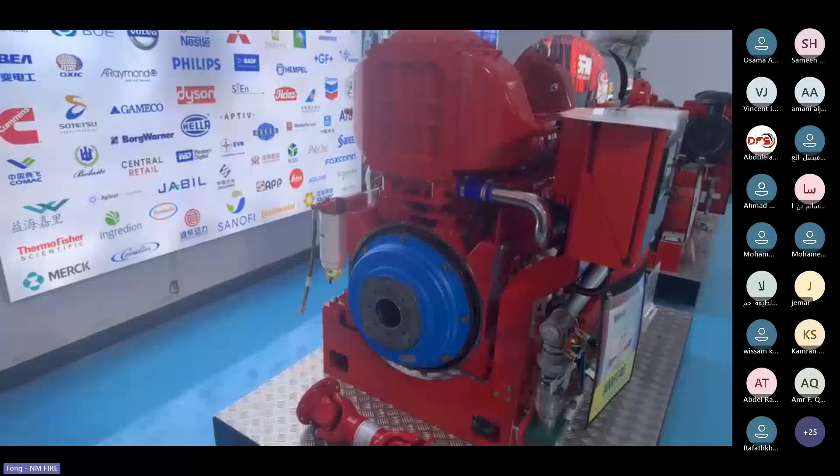The function, the purpose we should have this torsional coupling is the engines—as I said, the main problem is the vibration, right? So the vibration is, no one can avoid it, okay, it should always be there. But we can minimize the vibration affecting the gearbox and the pumps. We cannot make zero vibration of the engine, nobody can do that, but we can minimize it. So the purpose is to minimize the vibration from the engine to the gearbox and to the vertical turbine pump, to make the gearbox and the pump run smoothly and safely. This is the main purpose of the torsional couplings.

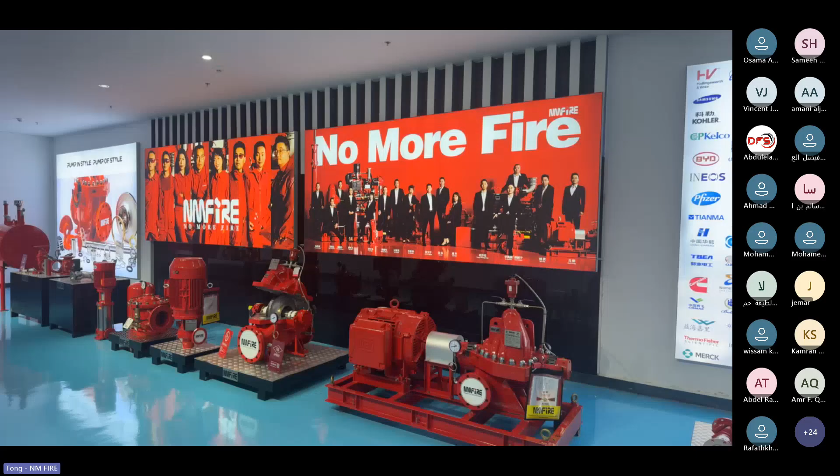Maybe they are talking about the water tank above the pump or under the pump. If this water tank is under the ground, then we have to use the vertical turbine pump. According to NFPA, we should always keep the suction pressure at positive pressure. So if the water tank is under the ground, below the pump, then we have to use the vertical turbine pump.

Okay, that was mostly the last question we are having in the list. Any other questions, gentlemen?

I have a question. Okay, yes Mr. Abdul. Mr. Tong, in short words, yes.

As a client, why should I choose NMFire for the Saudi Arabia market? We would like to answer the visitor in two languages. You will answer in English and engineer Sameeh will answer in Arabic, because I think this is the most popular question around people's minds now. You provide your pump, you provide many things, but we would like to explain to them in simple words why they have to choose us.

Okay, you can speak Arabic, no problem. Yeah, Sameeh will answer in Arabic. Sorry, I was on mute.